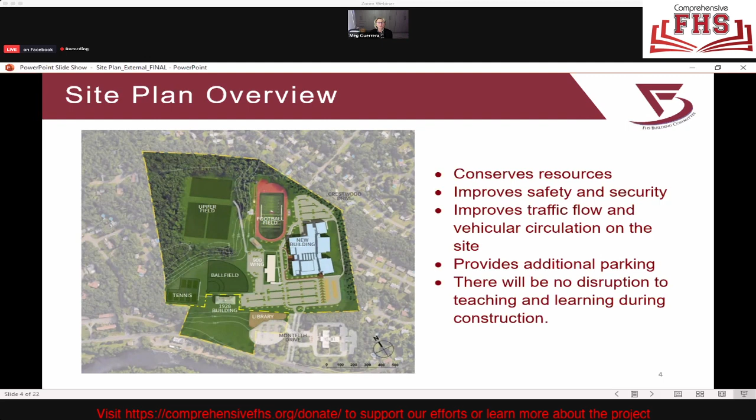The site plan for the new 3-story, 239,000 square foot high school conserves resources, improves safety and security, improves traffic flow and vehicular circulation on the site, as well as improving traffic on Monteith Drive that we'll talk about a little bit later, and provides additional parking. Because of the location of the new building, there will be no disruption to teaching and learning during construction. We'll talk about that in more detail as well.

First, we will review the sequence of construction and improvements made to the high school site. The construction of the new high school facility will be done in phases. Phase 1, starting in fall of 2022, consists of some early prep work, plus the construction of a new building and most of the new parking lots and driveways on the eastern side of the building.

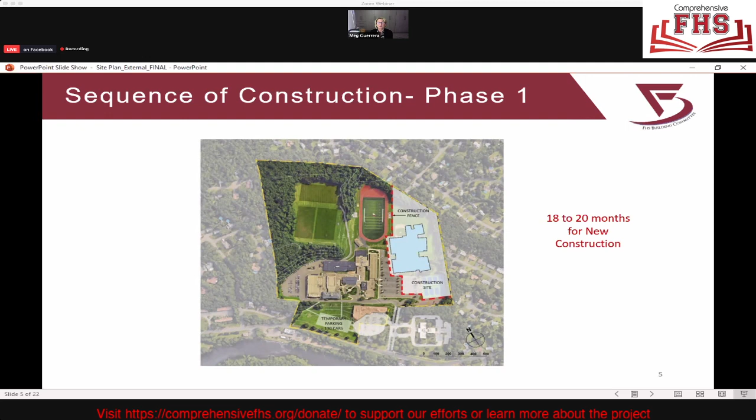The early prep work includes construction of a new temporary parking lot adjacent to the town library, the widening of Monteith Drive, and the installation of a new berm along the eastern property line, along with a fence and plantings to provide screening for the neighbors. In order to improve the flow of traffic into and out of the site, the widening of Monteith Drive will be completed before construction of the new building. The new building is scheduled to be completed by the summer of 2024.

After the existing high school is vacated in the summer of 2024, the next phase of construction, namely phase 2, can begin. This phase will focus on activities on the western side of the site, and it will consist of the demolition of most of the existing building, except for the 1928 building and the 900 wing, which we will talk about in more detail.

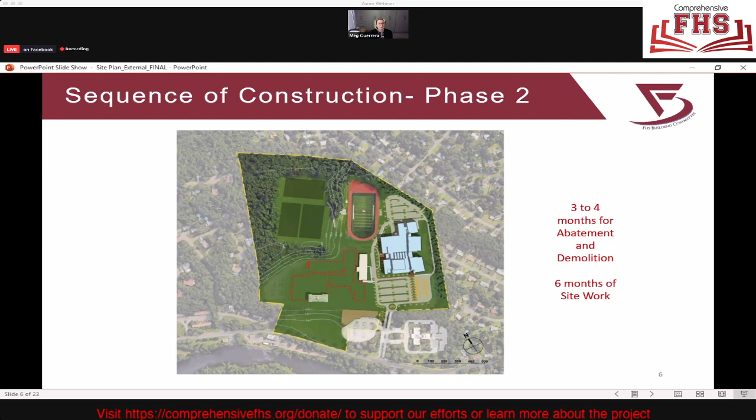Once the demolition work is completed, the site utility work and regrading of the western side of the site can be done. This phase of the project is scheduled to begin during the summer of 2024 and be completed during the spring of 2025.

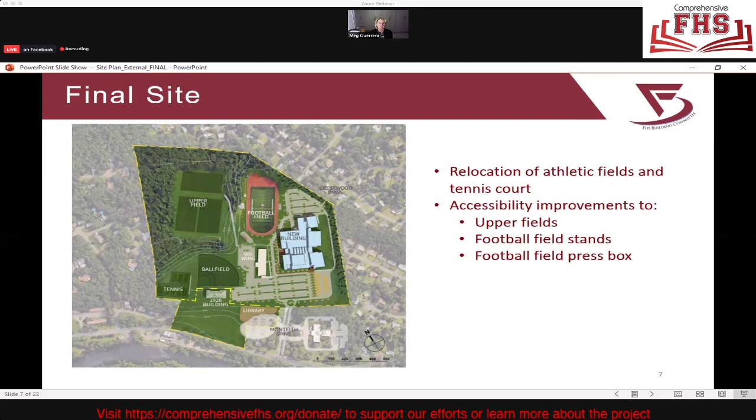The final phase of construction will be to complete the site work, consisting of new parking lots and driveways on the western side of the site, as well as the new ball field and tennis courts. The temporary parking lot installed during the first phase will be removed, and the site restored to a grassy field. This final site work also includes accessibility improvements to the upper field, football field stands, and press box.

So in summary, the proposed design allows for ideal construction phasing that will minimize disruption of the existing school. This was a really important part of the conversations for the building committee, Board of Ed, and Town Council as we talked through possible solutions. By placing the footprint of the new building on the eastern side of the site, we can avoid disrupting the teaching and learning activities in the existing building.

The construction area will be kept separate by enclosing it with a secure fence. Accommodations will be made for a temporary parking lot so that parking capacity at the existing school is not reduced, for safe pedestrian paths, and for access to the existing school from the surrounding neighborhood during construction of the new building. I mentioned earlier that there are two portions of the existing building not included in the demolition work: the 1928 building and the 900 wing, constructed in 2003. I will now review those two sections in more detail.

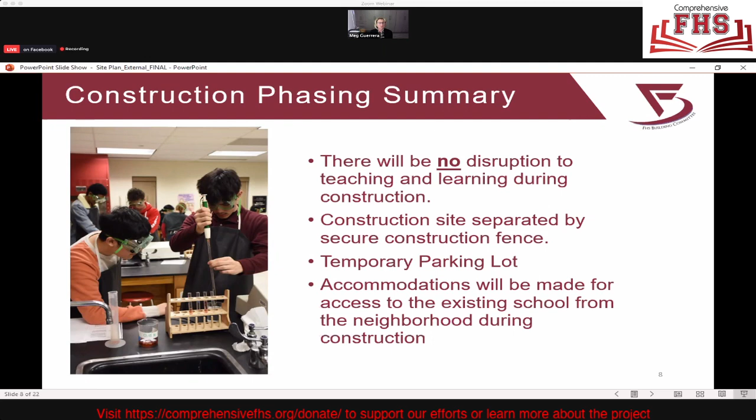The FHS Building Committee was directed by Town Council not to include the 1928 building as part of the cost or scope of the new high school project. I'd like to ask CJ to provide more details on this Town Council decision.

Mute again, CJ. Got two mute buttons, I keep hitting the wrong one.

When we looked at the project, there seemed to be a great deal of confusion among the public, because listed in the project was demolition of the 1928 building, a decision that has not been made and would be made by the town residents themselves. So it seemed a logical decision to take that out of the initial proposal.

There was a dollar price put on the renovation of that building, which was just a generic number. If and until we decide what will be done with that building, there's really no way of knowing what the actual cost for renovating it is. The key factor is students will continue to occupy that building until a new building is completed. So if we pass this referendum and a new building is begun, we can start that discussion on what we do with the 1928 building. There's no decision to be made until a referendum passes.

The town council felt it was the most logical decision to separate the two issues. At whatever point we get to after passing a referendum, we can propose to the town what the options for that building would be, what the costs associated with it are, and then they could make an educated decision on what to do and move forward. So that is why we felt it was important to separate the 1928 building from the entire FHS building project.

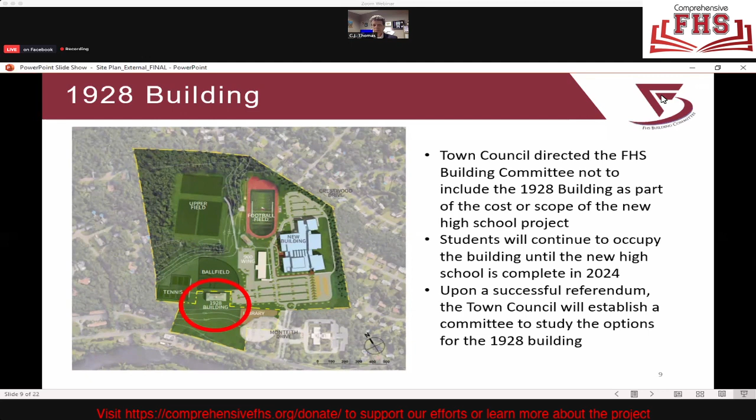Okay, thank you CJ. Now we can take a little bit of a closer look at the 900 wing, which was the other portion we highlighted during the timeline review.

The high school project includes the renovation of the 900 wing, which is circled on the slide, which will provide offices for the Farmington Public Schools Central Office, as well as locker rooms for boys and girls teams. The relocation of central office to the renovated 900 wing addresses space needs at Town Hall, which is included in the statement of needs presented to the building committee by the Board of Education.

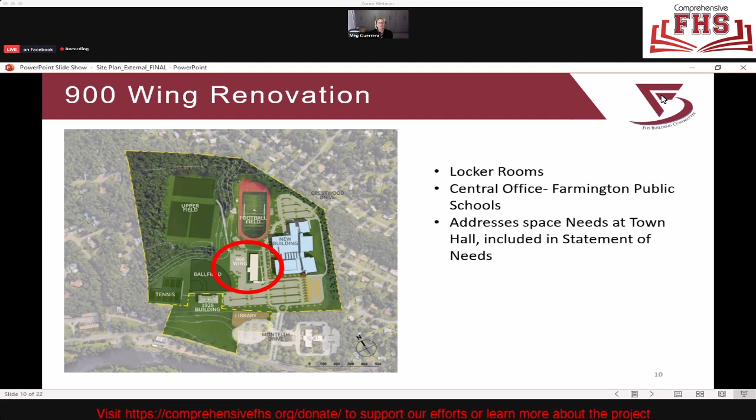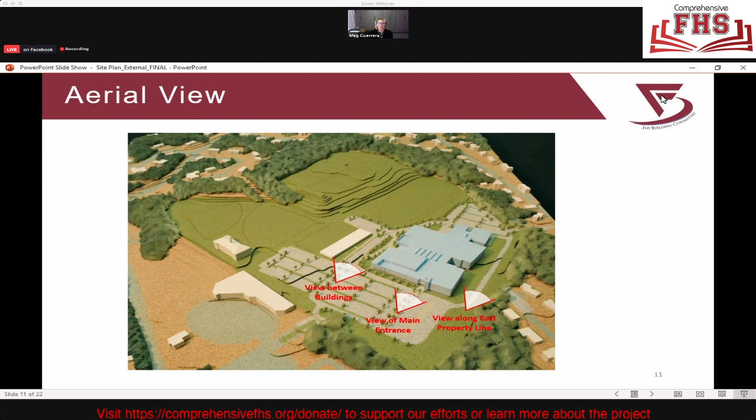So we're going to take a look at the aerial view of the site. This model represents a three-dimensional view of the site. I will walk you through the three vantage points: the main entrance, then between the 900 wing and the new high school, and along the eastern side of the building where there is a reinforced walkway for emergency vehicle access.

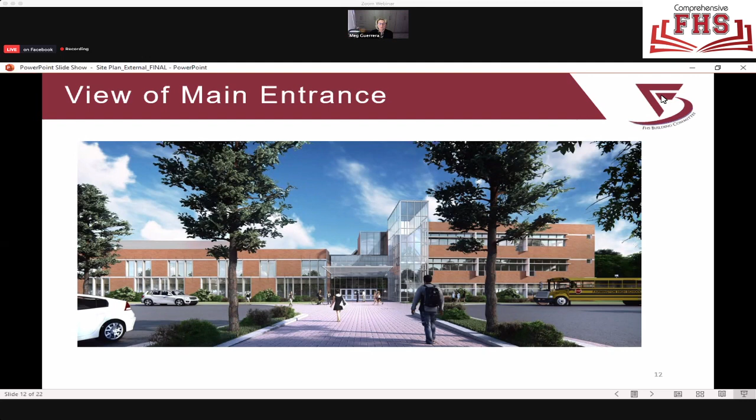This is the space between the 900 wing on the left side and the new high school on the right. You will see that vehicles are able to travel to the back of the site, leading towards the football field, as well as the after hours entrance into the school.

This illustration shows a cross section through the site. You can see the upper fields, the existing football field, the new building location, and the neighbors to the right. The new building is set back 150 feet from the property line.

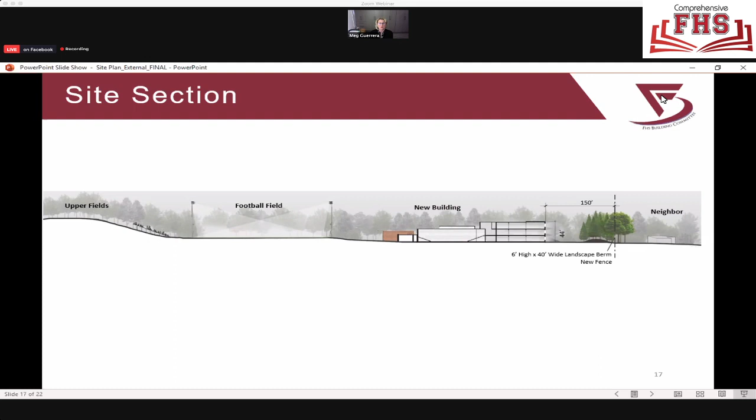A visual screen will be created utilizing a berm and plantings. The berm is proposed to be 6 feet high and 40 feet wide.

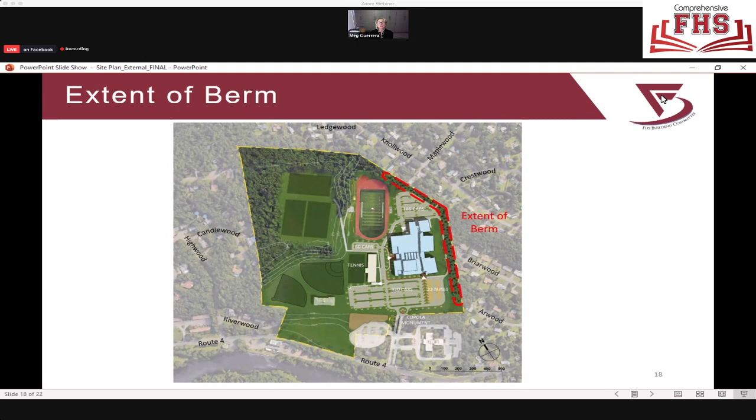And here's a different representation. This slide shows the extent of the berm that will extend along the property line, those red lines that you see there.

So let's talk a little bit about circulation. I want to highlight how circulation will occur on the site. The site will provide expanded on-site parking for visitors and staff throughout the campus.

There will be dedicated areas for parking and bus access on the south side of the new school building near the main entrance. Buses will have their own loop, and a dedicated parent drop-off lane will be parallel to the school's main entry walkways. Site parking is designed to provide the majority of student parking near the main entrance.

Staff parking will be to the north of the new building, along with service access. The traffic pattern for service vehicles is to go directly in the back of the building, which is buffered by the back of the gymnasium and a classroom wing. Monteith Drive, the existing access drive, will also be widened to provide 2 full lanes in each direction.

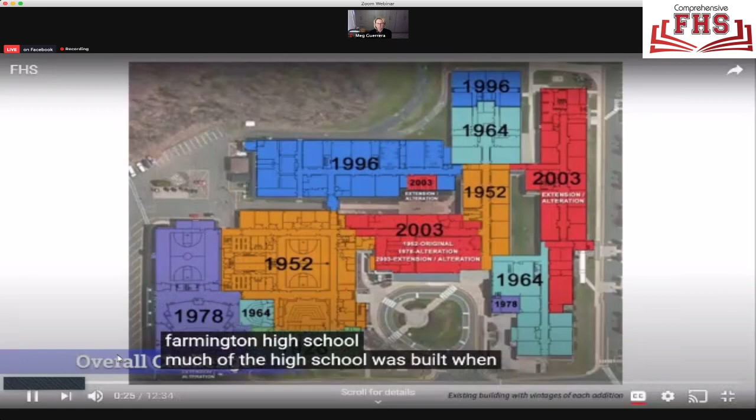Much of the high school was built when enrollment was 800 students. Farmington High School now enrolls approximately 1,300 students. Ten additions have been added over the years to address the growing student population, but there are many spaces that cannot accommodate today's teaching methods.

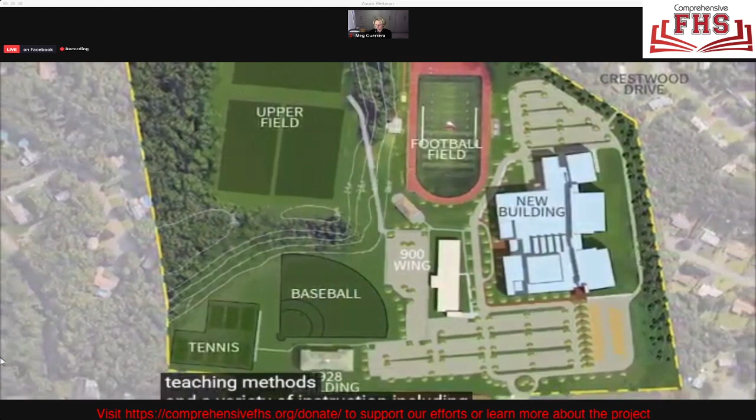The proposed building provides flexible spaces that can accommodate a variety of teaching methods and instruction, including individual, small group, and large group instruction. The building also creates communities of learners by clustering classrooms around breakout areas, faculty offices, and support spaces. The new facility is planned for future student population growth over the next decade.

There are 23 separate entry points, sightline issues, challenges in separating the high school boundary from public access points, and inadequate lighting inside and outside the building, creating a challenging building orientation. The current parking lot configuration does not provide nearly enough parking. Unclear walking pathways present safety concerns and do not meet current standards for school safety.

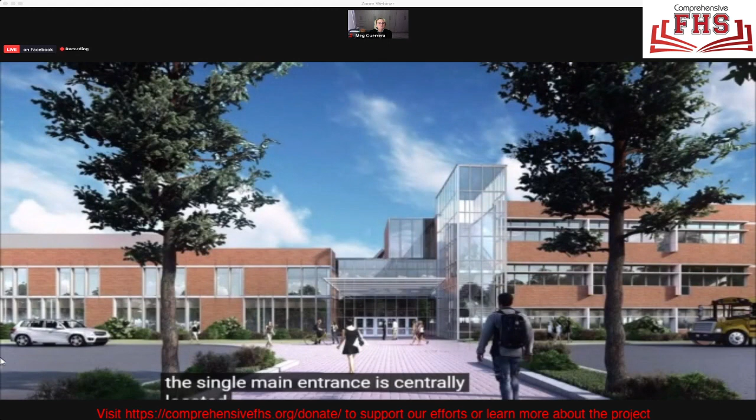The entrance will be obvious to visitors arriving at the new FHS. The single main entrance is centrally located at the convergence of car, bus, and pedestrian approaches. A wide pedestrian-safe walkway leads directly to the front door. The school office is located immediately adjacent to the front door with a clear view of visitors approaching the building.

During a 4-minute passing period, sometimes close to 1,000 students move through our hallway intersections. This creates crowded movement and not much time for students to get to their classes.

The new FHS provides generous circulation paths filled with natural light from above. Major assembly spaces such as the library, cafeteria, and auditorium could be located along a central corridor, which is large enough to serve as breakout areas or as a lobby for those assembly spaces.

The overcrowding we face at Farmington High School is experienced daily in our basic classrooms. They are occupied every period of the day, making it difficult to hold planning meetings, meet with small groups of students, or host special programs.

The classrooms have ongoing problems, including a range of temperature fluctuations as a result of no air conditioning, ongoing leaks, and aging equipment. The remote second floor of the original 1928 building currently houses the art and world language departments. These classrooms are small, cramped, hot in the warm weather months, and cold in the winter.

There is very little storage. In-process and completed student artwork clutters the classrooms and hallways. These spaces are only handicap accessible via the outdated and many times non-operating elevator.

There are a number of students taking business classes who intend to pursue business programs in their post-secondary education. Unfortunately, there is only one business classroom. Due to this limitation, we cannot keep up with the increasing enrollment and interest in advanced technology and business studies.

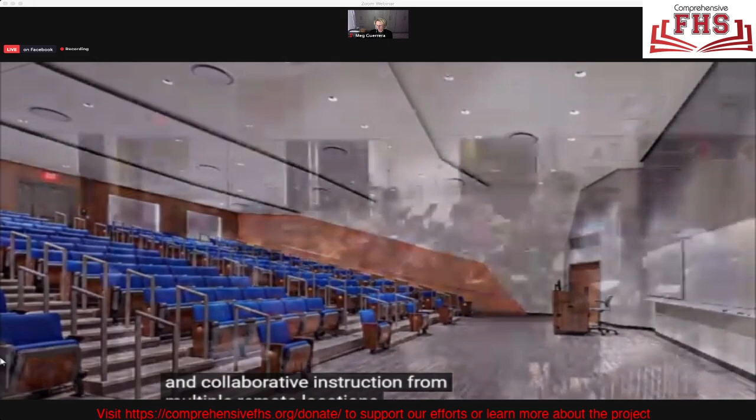Our current music room is an example of the challenges that growing enrollment can place on a program. This space is too small for the number of students who attend music classes. Students often have to practice in hallways and stairwells.

There is also insufficient storage for instruments and other equipment. Most importantly, it is not ADA compliant or accessible for our disabled students.

The new FHS provides rooms that can support large and small group ensembles for music practice, with the appropriate acoustic separation from adjacent spaces and with acoustical treatment within the rooms.

Due to a lack of teaching space, the science labs must also function as classrooms and workspaces. There is insufficient storage for scientific chemicals and equipment, which can create a safety issue for our students and teachers. We are very careful when working with them, but are still limited due to the dated space.

In applied arts classes, students work with power tools and all kinds of objects. The classroom is too small to expand on project opportunities, as these types of projects require sufficient space to ensure student safety. The new FHS provides clean, safe, and organized workspaces with adequate storage facilities for materials and tools.

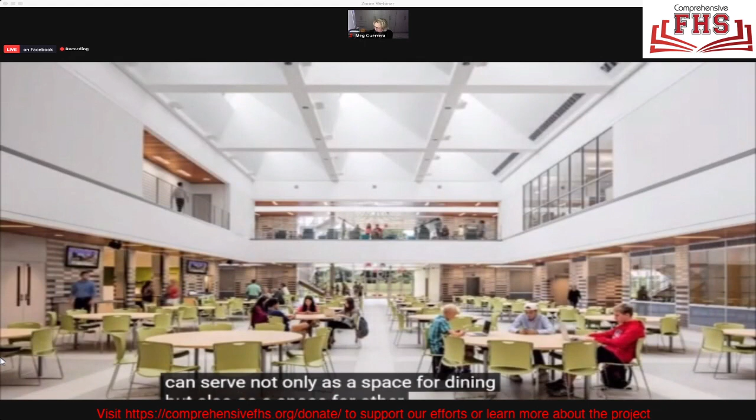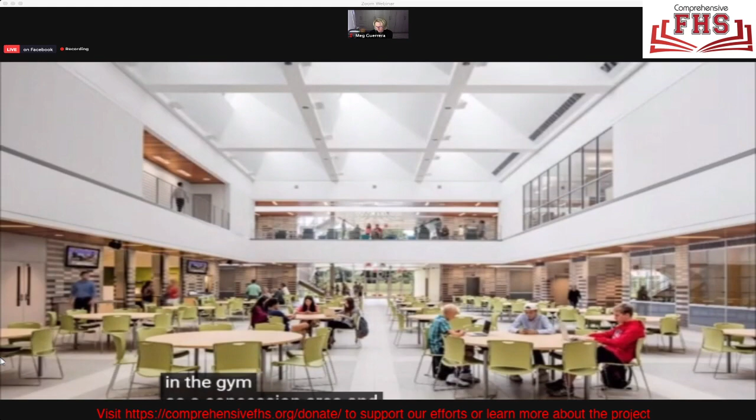The space in the photograph is a high school cafeteria, and it also functions as a ticketing lobby for the auditorium and the gym, as a concession area, and as an assembly space for various meetings and presentations.

The old gym is too small to hold any athletic events. Therefore, it can only be used for storage, small practices, and some gym classes. The main gym is not ADA compliant or handicap accessible when the bleachers are pulled out.

There is no air conditioning, so it is often very hot during late spring and autumn events. It is also located directly across from the auditorium, so these two popular areas must compete in terms of space, sound, crowd control, and parking.

This gym is divisible by an overhead gym curtain and contains retractable seating on both sides.

The high school currently lacks adequate breakout spaces for collaborative class activities. As a result, students must sit on the hallway floors when doing group work. This is not an ideal learning environment.

The new FHS provides ample opportunity for breakout spaces adjacent to teacher work areas and near classroom clusters. Breakout spaces that are comfortable and attractive can offer greater opportunity for spontaneous discussion, group activities, and interdisciplinary teamwork.

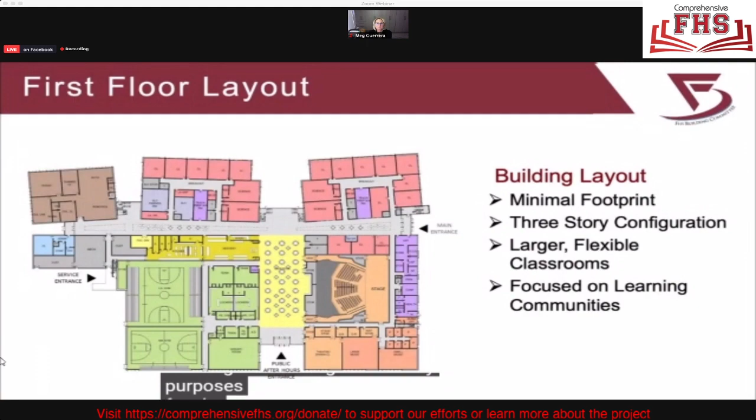The new FHS administrative offices will be located in the main entrance of the building. This provides maximum views of people entering the building for security purposes. Faculty offices will be placed in each of the learning communities to encourage interdisciplinary collaboration.

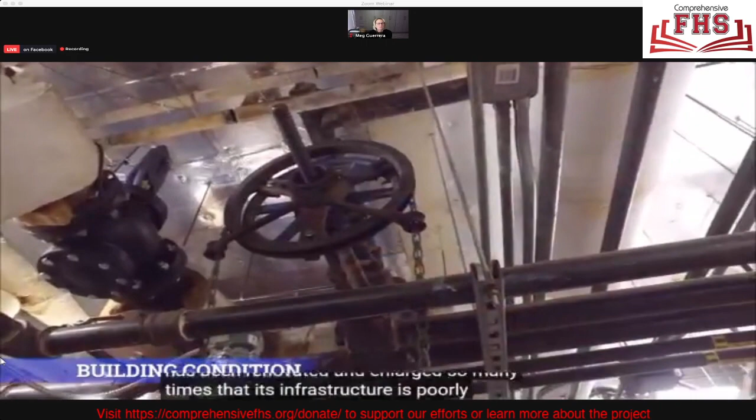The existing building has been renovated and enlarged so many times that its infrastructure is poorly arranged, with multiple heating and cooling systems of various vintages, a bewildering distribution of wiring for electricity, and a confusing maze of piping for plumbing and drainage. This makes maintenance difficult and costly.

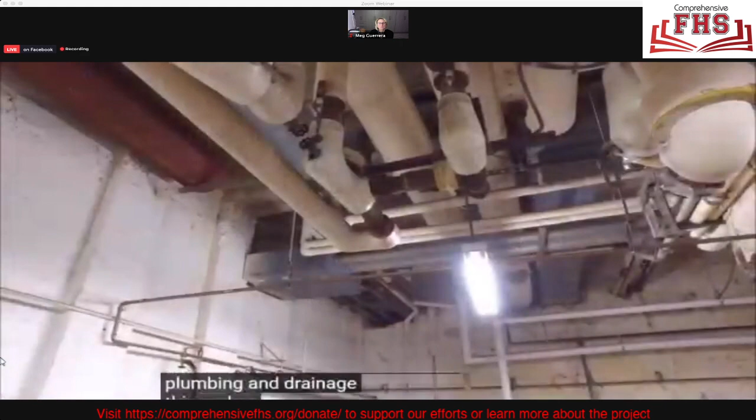Many components are outdated and replacement parts are no longer made. Most of the existing building is only one story in height, resulting in many roofs of different ages, with many joints between those roofs. The result is an existing facility that has reoccurring failures in its infrastructure.

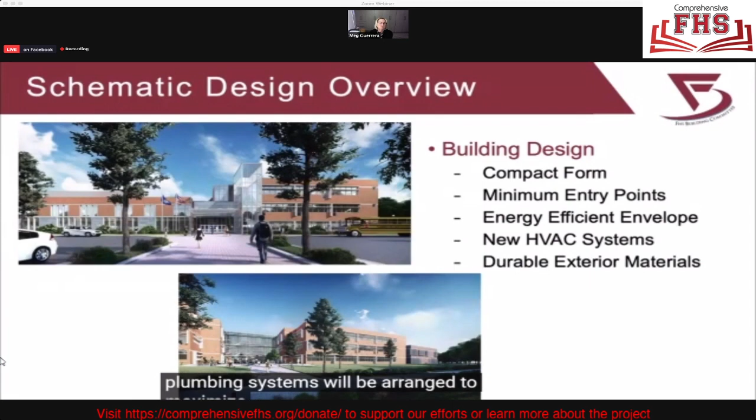The new FHS is planned to minimize its roof area and its exterior wall area. The design uses energy-efficient walls and windows to reduce heat loss in the winter and heat gain in the summer. Walls will have more insulation and less infiltration, and new maintenance-free windows will improve security and energy efficiency. The new mechanical, electrical, and plumbing systems will be arranged to maximize efficiency and simplify maintenance.